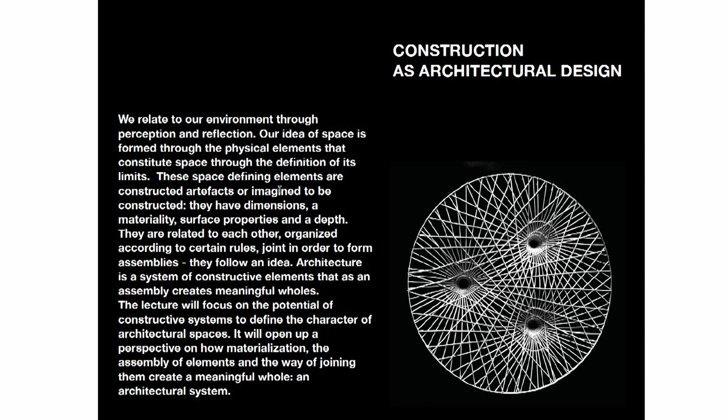Welcome from my side. I'm going to talk about construction and architecture, with the point that construction is architectural design. It's an important, integrated part of architectural design, and has a lot of potential to work with, to define spaces. So I'll try to make an argument for it and show some examples of how that works. If you have any questions in between, I'll try to make a small break.

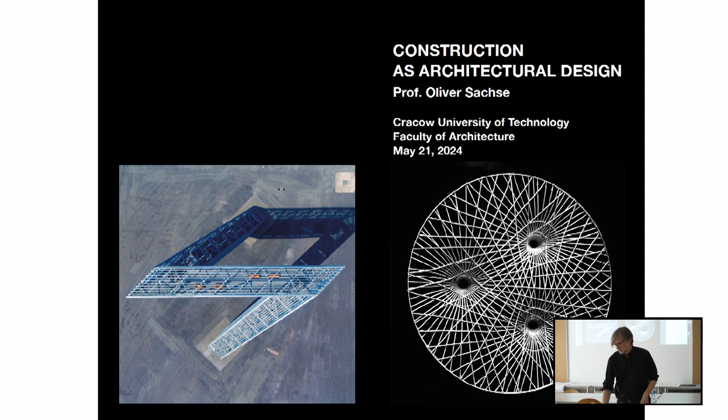If you have any questions, just raise your hand or somehow let me know. There are two images that have to do with it, and especially the right one, a student work, really fascinated me because of its beauty, and it's a pure structure. It really shows the point I'm heading to, that structure is design.

First, let me introduce myself a little bit, because we don't know each other yet. My name is Oliver Sachse. I'm teaching at the University of Applied Sciences in Erfurt, doing a guest professorship this semester, mainly in the second year. I actually live in Berlin, so these are the spots I'm moving between this semester. Erfurt is a beautiful city, about 200,000 inhabitants, quite a bit smaller than Krakow. It has a very historical center, and we also have a nice historical building. It used to be a drawing school from its beginning, so it always had to do with architecture.

We have at our school a certain focus on what I would call constructive architectural design. We call it Konstruktives Entwerfen—really an integration of these two ways of thinking, with the argument that it's actually the same. We're working a lot, and you can see it in these student work examples already, that the structure has a lot of expression. It gives a lot of atmosphere to the spaces that are constructed with these structures.

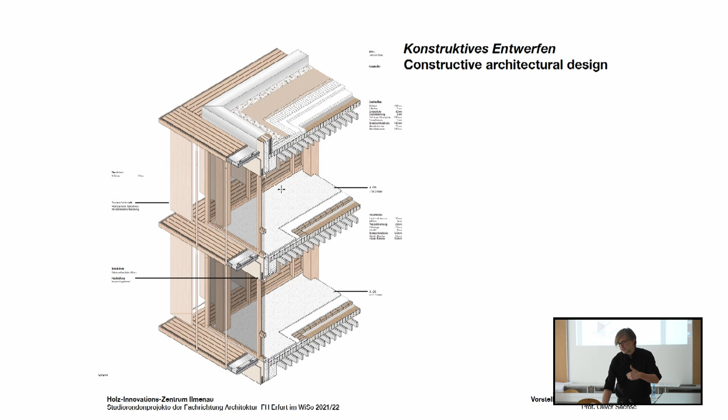It's also moving forward into the detailing, because it doesn't stop with an overall system—it's really about how things are then taken a little bit further into the detailing. All these things, the detailing and the system, belong together. It's always about spaces that are constructed, not about construction in itself. These are second year work examples of our students working with structures to create a certain atmosphere in their designs, in their projects.

I put this in because as a student, quite a while ago, I got in touch with structural engineers. It was in a design project class, and we had consultations with Manfred Grohmann, who became quite a famous German engineer. He did a lot of outstanding buildings, the structures for outstanding buildings. I learned about the other constructor and the way architects and engineers work together, and it fascinated me. I probably couldn't express it at the time, but something was very interesting, so I applied and started to work at their office as a student. This was one of the projects I was working on, being a small part of it, but a very interesting one.

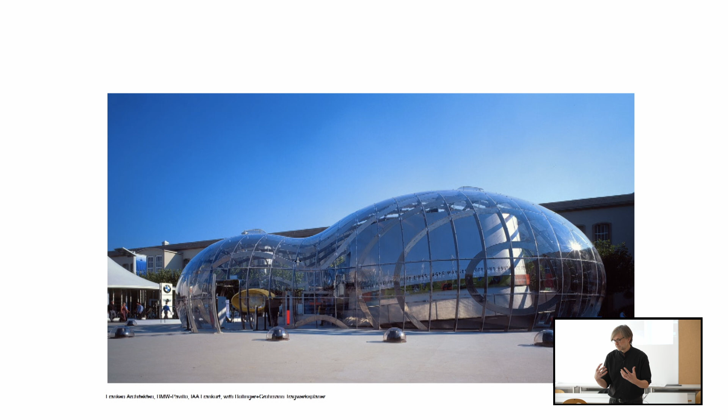It's a pavilion for BMW at the car fair in Frankfurt, by Franken Architects. It was a lot about how to basically achieve this shape, which was a very formal idea. Then the question was how could we build this in a very short time and also make it demountable. We looked at the details—how could we resolve, how could we deal with such a geometry? That was a main part, and how could we really make it work as a structural system. That was the first time I got in touch with these issues in a project.

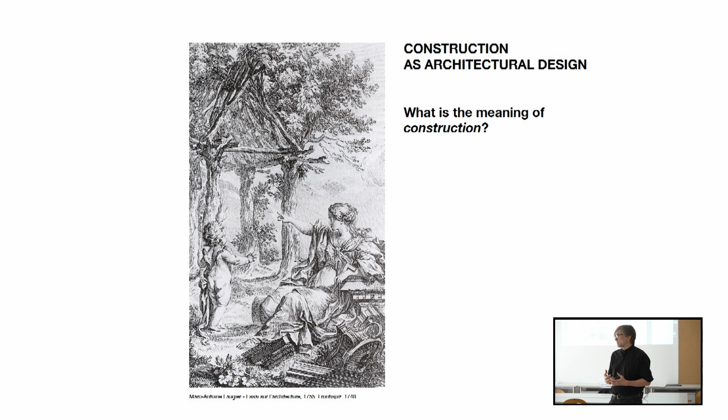So we're talking about construction, and I always like to look into what the word is about, because if you look at where a word comes from, it often tells you a lot about the character of what the notion actually means. So what is construction? If you look at the word's meaning, to construct means to design, to erect, to build—supporting my argument. It also has a grammatical meaning: arranging words or sentence elements together. It really comes from language, and means putting single elements together so they form a whole, a sentence, something that has meaning. I think it has a lot to do with what we are doing in construction.

Construction means the design, the building, the joining of words or sentences to create meaning. It comes from the Latin constructio, a combination of con and struere. Struere means piling things up, putting things on top of each other, or joining them together. That's where the word comes from.

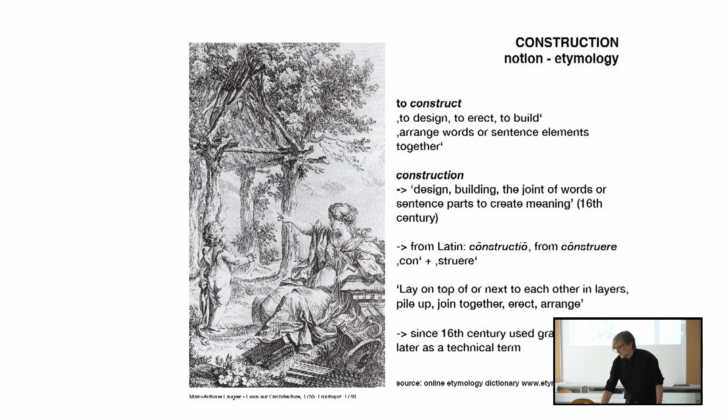It was first used as a grammatical term and later became a technical term. There are many different ways construction is used. You could use it as a design or thinking process through development—how could we construct it so it works as a physical building? It could also be the next step: the physical process of erection is also called construction. And the result in the end is also called construction—what's finally standing there?

I already pointed it out a bit, but I think there are very interesting aspects in the meaning of these words. It's the notion of joining elements together so they form a meaningful whole, something complete, creating a system as a whole. It also has an aspect of a project, which I think is a very nice idea.

The term project has a lot to do with projection. A project is something you have as an idea, which is not realized yet, but is thought to be realized someday, sometime.

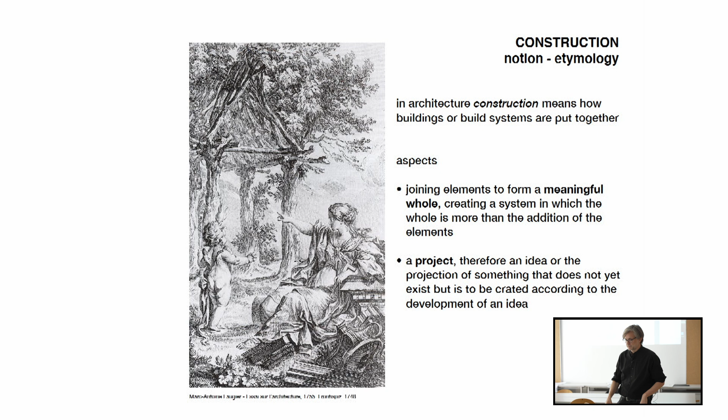You all know this design process. It's kind of a projection, so one-directional. But the process doesn't actually work that way—it's kind of a circle. You do something, you have a thinking, an imagination, you put it down on paper or on a model. Then you look at it, you criticize it, and go back and develop your thinking. So it's a circular process that moves forward, maybe like a spiral.

So this is about the term we're talking about: construction.

Now the question is, how do we actually work in architecture? How do we form space? If we're looking at the formation of space, how does it exist? You can say that's the outer space, something that has no limits, maybe just horizon—not really something you, as a person, could relate to.

There's a nice book about thresholds that I took this from. It's an example from Superstudio, who worked within that space and tried to structure it, because it needs some structure. According to Descartes, as the book says, the world is a spatial continuum, and thresholds only exist to the extent that they are produced. That's what we are doing—we're producing thresholds, producing limits to space, to really define a space.

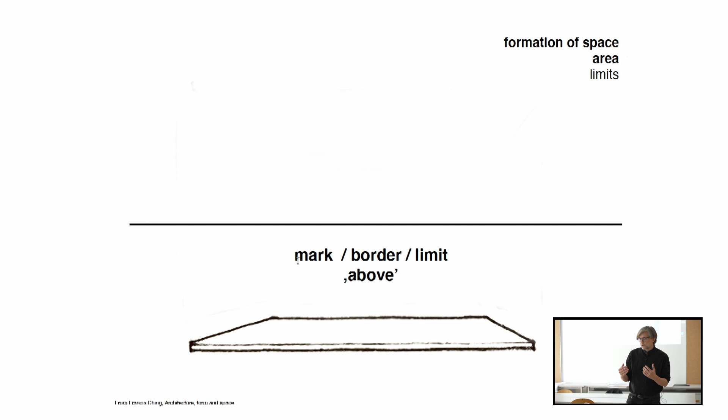How does it work? It could work just by having a plain ground and putting some area, a border around it, and there you already have a definition—something that is above that ground. It's a first spatial definition.

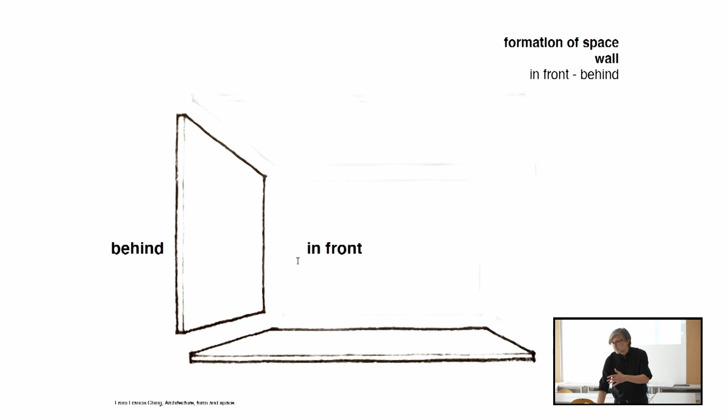You could also say, I put a wall somewhere, and then you suddenly get something—a space in front, that's where you are, and something that is behind it. So there's a division, a definition of space, of spatial qualities as well.

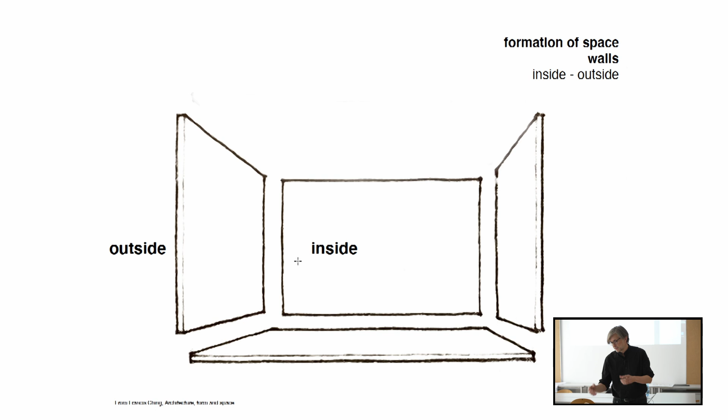And if you put a couple of walls and arrange them in a three-dimensional way, you get something like an inside and an outside—not in front and behind, but inside and outside. And if we put a roof to it, it becomes below.

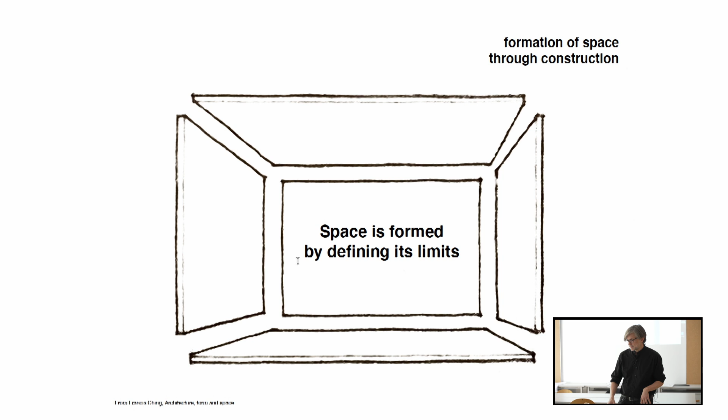So that's the formation of space through construction. Space is actually formed by defining the limits, and that is actually what construction does. It makes these limits. So if we're thinking about how to create space, the construction is our means, our kind of tools that we work with in order to create space.

The physical elements, and as long as they are not built as physical elements, it's kind of an idea of a physical element. So then you have kind of limits, and there's still another very important thing that has a lot to do with constructing, in the meaning I just mentioned, that it's forming a whole, making a meaningful whole, a meaningful system.

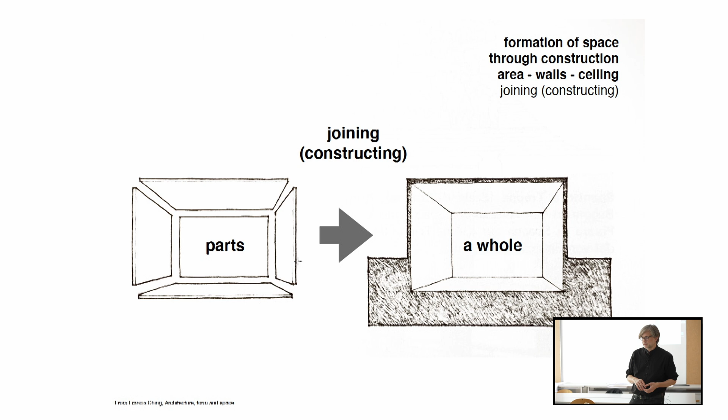It's basically the way that these parts are put together. So you can imagine if you have a roof and a wall and they're not connected, you're not really getting a really enclosed space. You still have air coming through, et cetera. So you have to join these elements to create a whole.

And then you get a system. These things interact with each other, they cooperate, they create a system in itself that is actually more than just the addition of the parts, because they are joined together in a sensible way.

And that is what architecture is. Architecture is a system, a system of building elements that act in combination with each other, that connect these elements, and that also works on different scales. So it works from the big picture, the outer volume, the image that you have from the outside, towards the interior spaces, towards how the elements are assembled within themselves and how they're connected to each other. All that forms one system to create a whole.

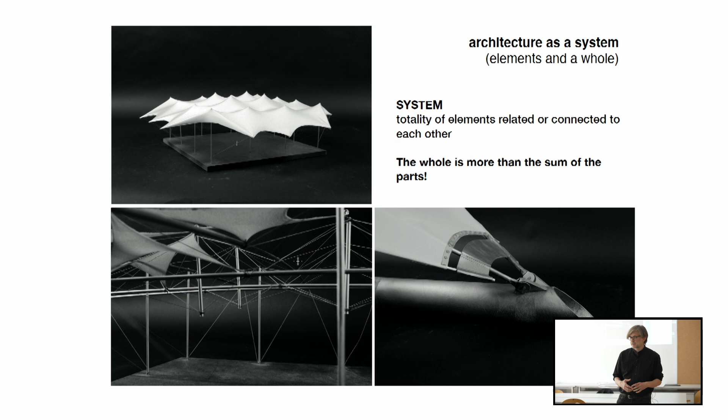And this whole, as I just said, is more than the sum of the parts. I think that's becoming obvious.

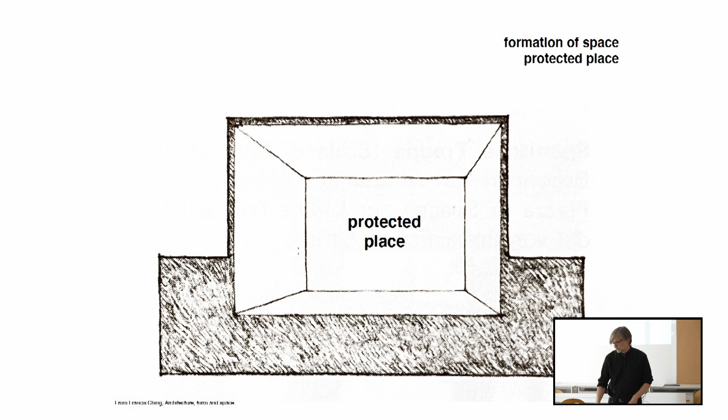So why do we do it? Certainly to create protected spaces, socially protected spaces. In the beginning, certainly climate protected spaces, and it's still very important. We want a warm condition in here, not too hot. If it's getting really hot outside, we want it a little cooler. If it's winter, we want it warm. We want it protected from sound, from people we do not want to deal with inside. So there are a lot of aspects you could look at for the protection of spaces.

He had a feeling that in this time there was so much decoration that he couldn't really see what architecture is about. And he made an argument that goes beyond that idea of a shelter I just mentioned, that the original hut is also an origin of architecture that has certain elements that are bearing elements, structural elements, construction actually.

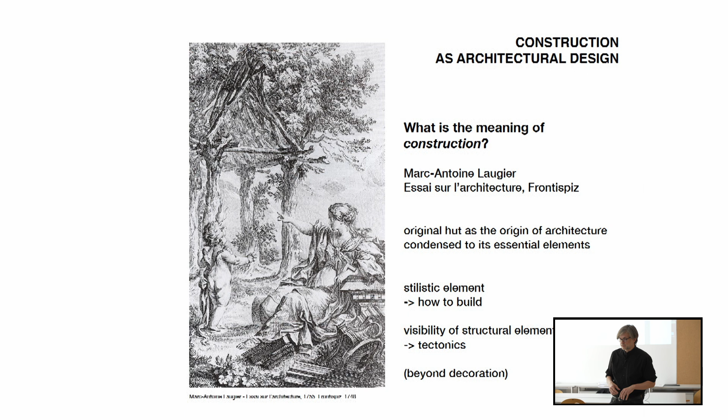So his argument was to put away everything that is decoration, that's added towards it, because that's not what the essence of it is. This was his point, to say we should reduce our architecture to these structural elements because they're actually all that we need to do architecture. Here in front you can see all these elements that are a little bit like garbage, taken away from what is the original idea of architecture.

So what's the relation of designing and constructing? I hope it becomes a little clearer, and to emphasize it a bit more, there's a very nice quote that I like a lot from Andreas Deplazes. He's actually at ETH Zurich, professor for construction and design, so it's like first and second year.

And maybe you know that he has written a very big book about construction. It's like this size, very interesting one. And from this book, actually Constructing Architecture, is this quote.

And it says, 'For me, designing and constructing are one and the same. I like the idea that the form is the result of construction and material, something concrete. However, I would view the restriction to this formula as a mechanistic reduction, because the shape of the form, intentionally or not, carries information beyond its material and constructive component, an intention.' I think there are some very interesting and nice ideas in that quote.

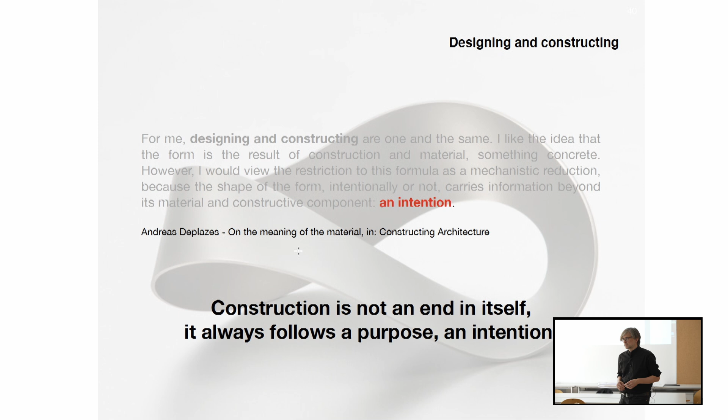And at the same time, it also says the form is a result of construction and material. And it's actually saying we're not designing something out of nothing, but we're actually designing with these materials. We're designing with the elements we are constructing with, in order to define the spaces that we want to have.

So, looking at building materials and the ways of assembling them, we had this quote: "The form is a result of construction and material." So he's pointing out the significance of the material.

Finally, we are doing physical elements. We are creating a built environment that is physical, that we can touch, that forms borders, etc. So the materials we're using, they have certain qualities, they have certain abilities and also disabilities, some things that they cannot do.

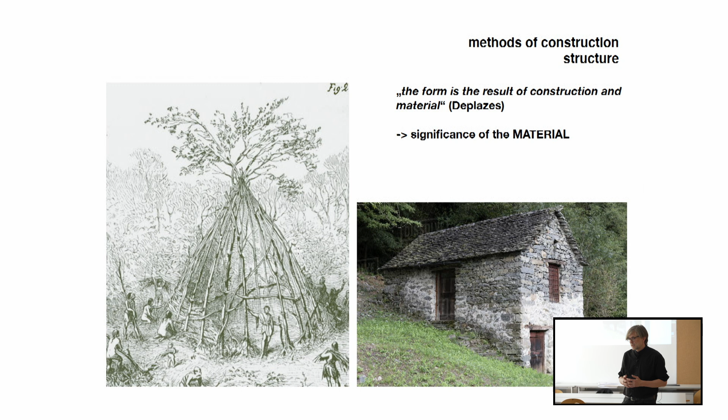And these are very important if you're constructing. And what materials should we then use? I mean, you certainly have to know the materials and see what you can do with them.

In the beginning, it was quite obvious. People needed to work with what they had, what they could find in nature. So it was stone, wood, and earth, basically - these three very principal, archaic, first materials that people were working with, they started to build with. And basically, this led to the formation of very regional construction methods, always depending on what was actually available, what can we construct, because we need something to construct with, so it's actually what nature gives to us.

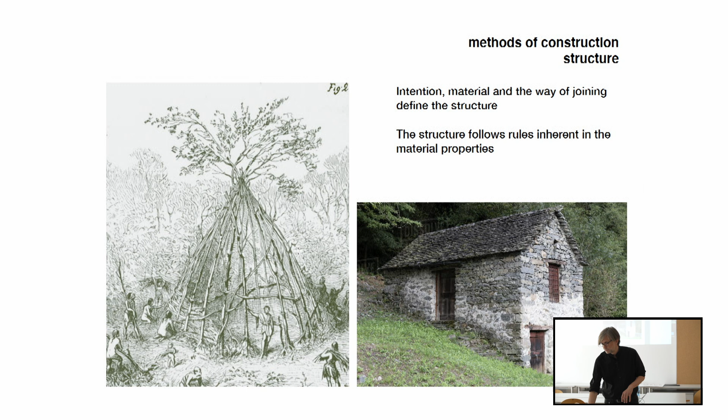And so you could say what's there - the material, the way of joining it, which is a technique, and the intention that you have - they form together a kind of structure, an idea of how elements, how space can be formed with these elements. And it always follows the inherent properties of materials, what you can do with it.

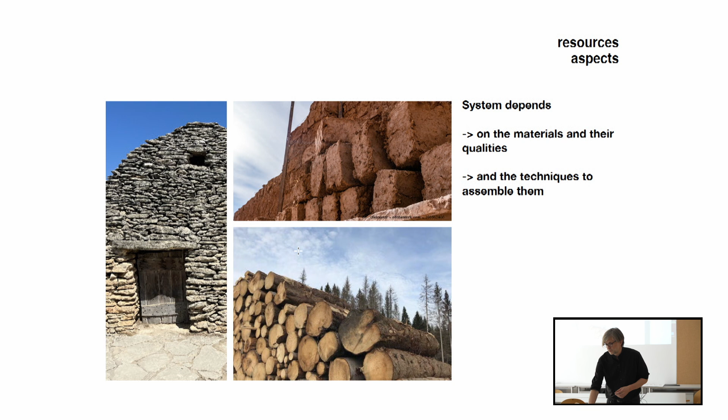Yeah, these are again these three kind of basic materials that people constructed with long before they were architects as such. These are like these traditional materials. It's this aspect of availability, of local building cultures arising from there.

And there's one aspect which I think is very interesting and very important. It's always about scarcity, because you had to really take the material, put some effort into it. So there's always, right from the beginning, the need not to use material thinking you could have as much as you like, but there's always a scarcity, and it forced people right from the beginning to think about how can I build in an efficient way, not using too much material, just using what I need to do what I want to do.

There's certainly a development about industrial materials, and just to mention the two most important ones: concrete and steel. As really industrial, cultural developments, it came long after that, and there's, you all know, a full variety of further materials used in construction. But these are the main, let's say, core materials for structural elements, load-bearing elements.

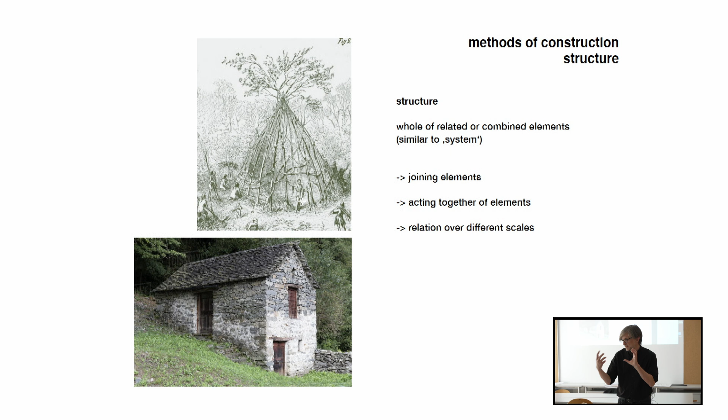I use the term structure, which obviously has a lot to do with construction. It's kind of the same word source. And actually it means something very similar to a system. Construction, structure is something that is joining together elements, where elements act together in a system, and that also creates, over different scales, a relation within the structure.

And you could look at how things are assembled, and what kind of main principles you could discover. You can really see there's two ways of assembling materials, or let's say of creating structures, built structures. It's a massive construction that works with material as a whole, planar elements, walls, and the skeleton construction, which is formed of linear elements. And these are representations of what that means, because you can already see the way the space is created is very different in these two ways.

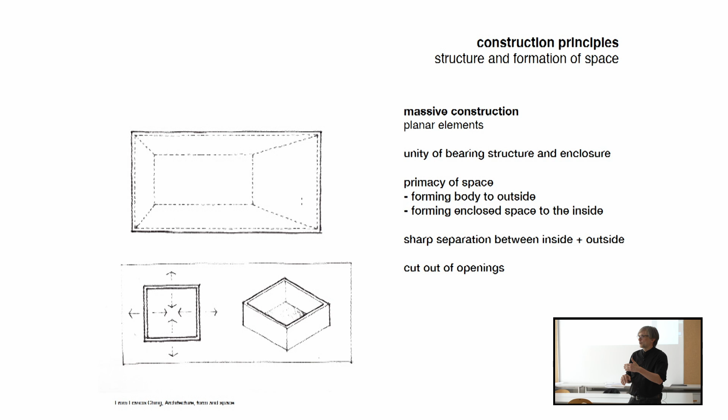I'm pretty sure you've heard about this already. The 5 points for a new architecture from Le Corbusier was actually, well, a little more than 100 years ago, was exactly in that discussion.

There was a lot of construction done as a massive construction, and he said, I want a new architecture. There's new possibilities, technical possibilities. We can put pillars instead of walls. We can make the separations between spaces independently from the bearing structure and give it a completely different shape. We can do a different way of openings.

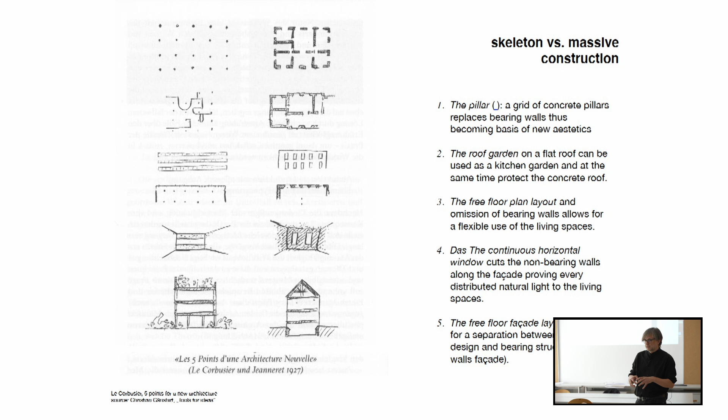So it's really something that we could even in that case say it became something like a political program to create new spaces. And you can see kind of from these sketches, very diagrammatic sketches, but they already say a lot about the different qualities of spaces that are created with these two methods, skeleton versus a massive construction.

And I'm not judging it. Le Corbusier was pretty clear about it. I think they both are very interesting because it always depends on what do you want to do? What kind of space do you want to create?

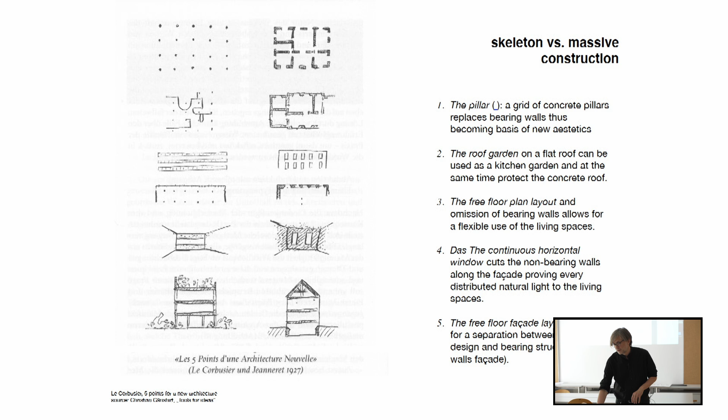Yeah, here again, it's kind of this essence of his point of creating this kind of free floor slabs that you could subdivide in a very flexible way. That's a Maison Domino.

So the materials, going back to that, the materials have kind of an inherent logic. Take for example a stone, which is a very small element, that you need a lot of to put together to form a wall, and you kind of need to assemble it in a way, and it's a way of layering.

It's not, and it has very different properties depending on the direction. It can carry a lot of load in the longitudinal way, and is not that good in the transversal way. And it has, from nature, kind of this linear extension. So it's obvious you need to work with it in a different way.

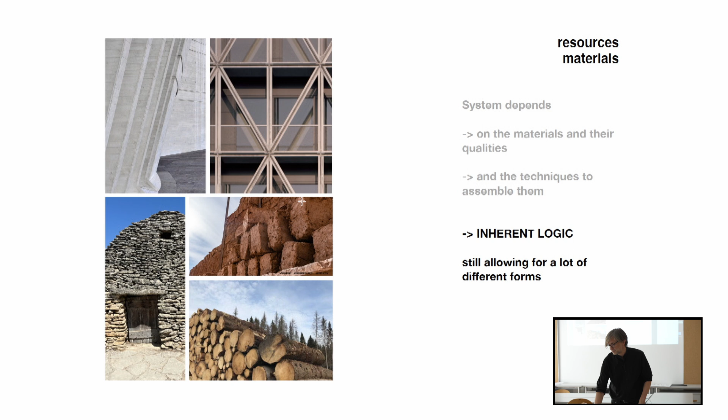And then you could say, okay, if I have a certain logic, I can just use it this way or that way. And I think this logic is something very strong, but it still allows for a lot, even if you follow this logic.

It still allows for a lot of different, you could call it phenotypes or expressions, a way of finally assembling them within a set of rules given by the material. Actually, on my last vacation, I found a very nice example. It was a small village, basically in southern France, and they just used stones they found on their fields for construction. It's a very archaic way of assembling. There was a nice exhibition about these types of structures, and there are a lot actually. I knew them from pictures from Italy, but you can find them all over Southern Europe.

So they had this table, really showing how many different ways there are to work with that stone, how many different ways there are to assemble them and create spaces differently, still following the same assembling rules that lie within the material, because otherwise it would just not hold. You need to lay it somehow.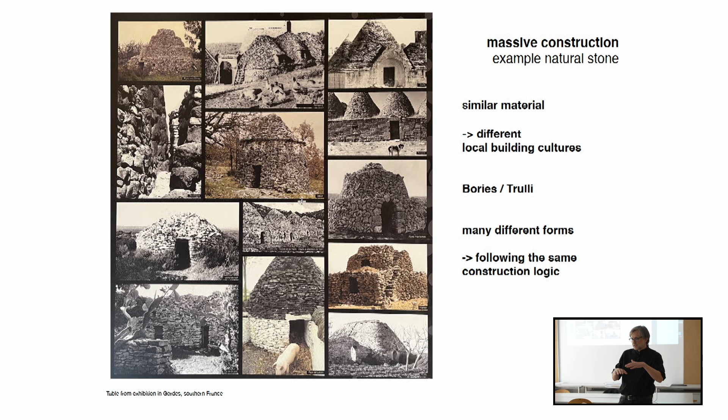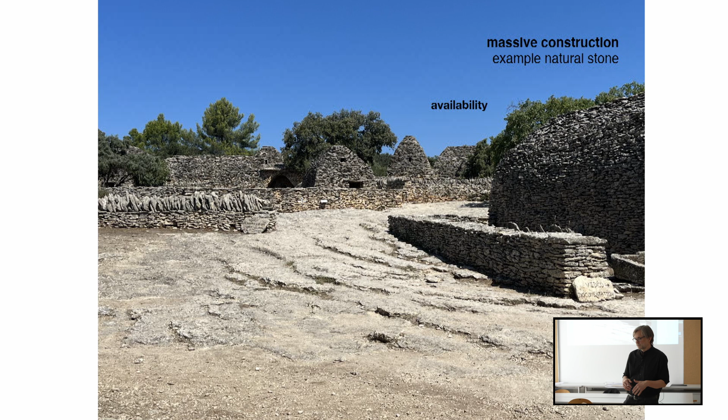There's a little overview of where these examples come from. It's mainly southern France, Spain, and Italy. So it has a lot to do with availability — rather dry areas, not so many trees, but a lot of stones. So let's use them to build.

It's this principle of layering, and it has the principle of the false arch to assemble the stones for the roofing. There's this arch, which by its shape and the way the stones are assembled creates a stable covering of the opening.

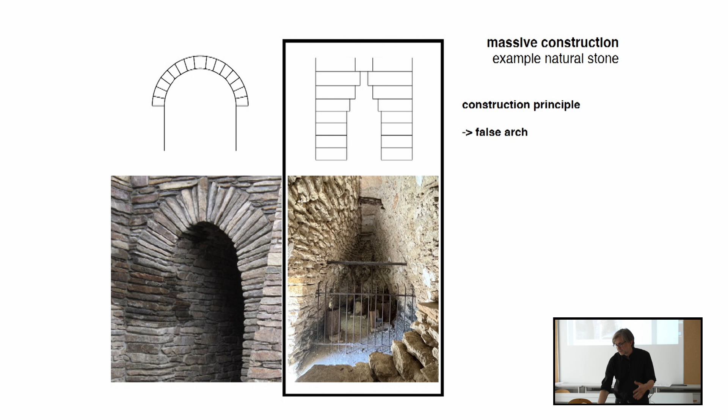And then you have what's called a false arch, because it's not really working with that geometry, but it's cantilevering the stones a bit more from both sides until they meet. This is actually the principle used in most of these structures.

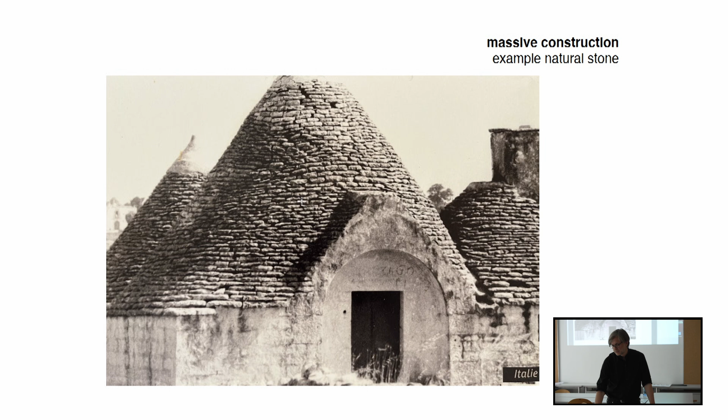I'll just run through the different shapes from this table, all created by the same technique. There are a lot of round structures, but also rectangular walls and a shape that morphs into a round cupola.

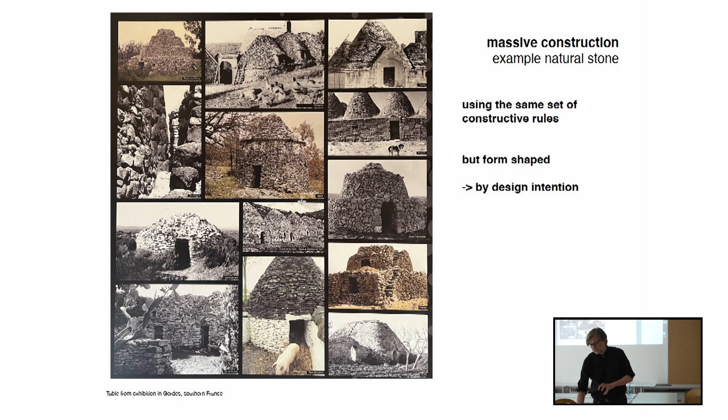I just think it's very astonishing how many different shapes people can create with the same set of material and the same rules. That's about the intention — what do I want to do with it, what shape is right for me for what I'm using this building for. It's a small excursus to show that even with a fixed set of rules, you shouldn't be afraid, because there's still a lot of liberty.

Talking about university, it reminded me of a book I found a couple of years ago that I really like. It's about first year construction and the basis of architecture, by Professor Annette Spiro from ETH Zurich. She makes exercises with her students about three principles of joining materials together.

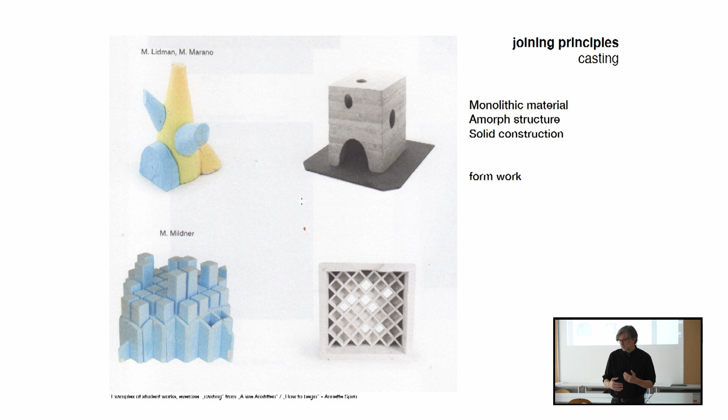So there's the technique of casting, the technique of layering, and the technique of frameworks. With casting it's a monolithic material, could be clay or earth, which has an amorph structure to create a solid construction. These exercises look like this — you can see there's a form, the formwork used to create certain spaces, which is very important in this technique of casting.

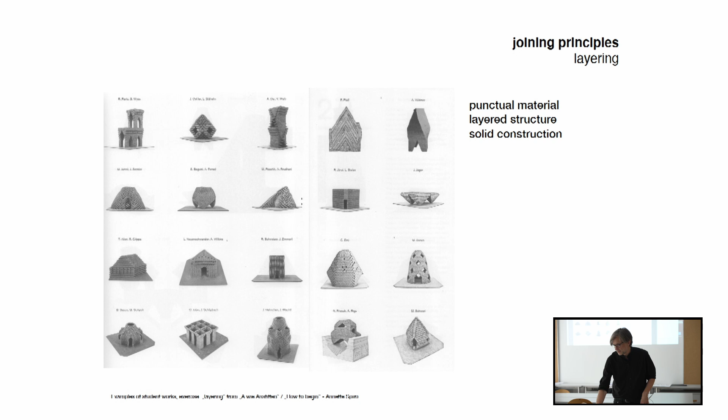There's also this principle of layering, done with stones or smaller elements. It's a layered structure, a solid construction, but you can work on it to make it a bit permeable. It has a very modular logic. If you work with brick someday, you'll see it has a very strong logic, and still a lot of possibility to create different shapes, to use it in different ways, while still following that same rule and principle of layering.

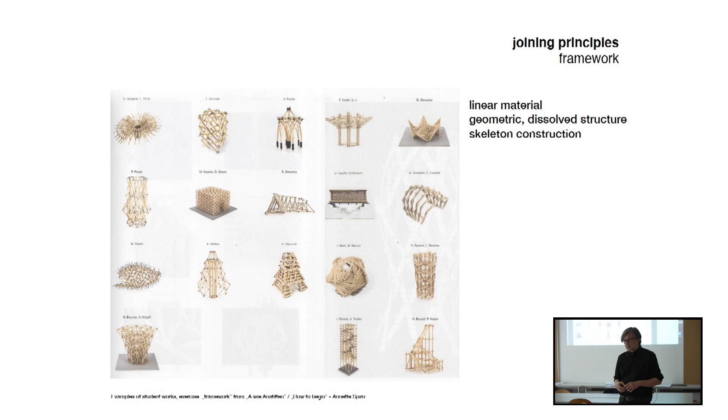And you also have this framework, linear constructions, often done in wood. I already explained why, because it naturally has this property — dissolved structures, skeleton constructions with this linear material, that can again be used in very different ways.

There's a very nice quote, and I will try to get the video online. I hope it works fine. By Louis Kahn. Have you heard of Louis Kahn? He's kind of a mid-last-century architect, a very important one actually. By his time, all my teachers were saying he was kind of their master in a way, and he actually worked a lot with the properties of materials.

Design demands that one understands the order. When you are dealing or designing in brick, you must ask brick what it wants or what it can do. And if you ask brick what it wants, it'll say, well, I like an arch. And then you say, but arches are difficult to make, they cost more money. I think you can use concrete across your opening equally as well. But the brick says, oh, I know you're right, but if you ask me what I like, an arch. And one says, well, now, why be so stubborn? And the brick says, may I just make a little remark? Do you realize you're talking about a beam, and the beam of brick is an arch?

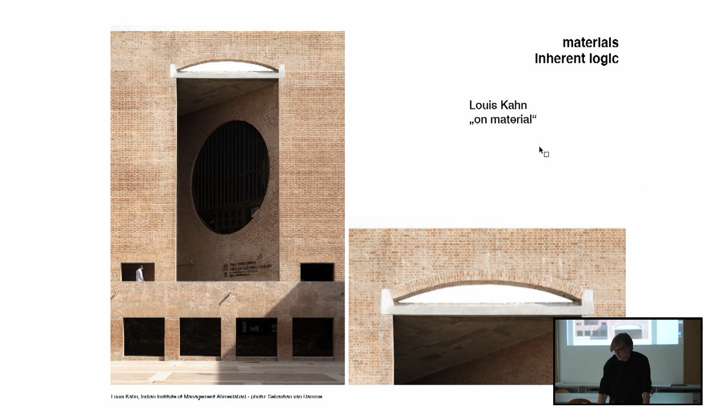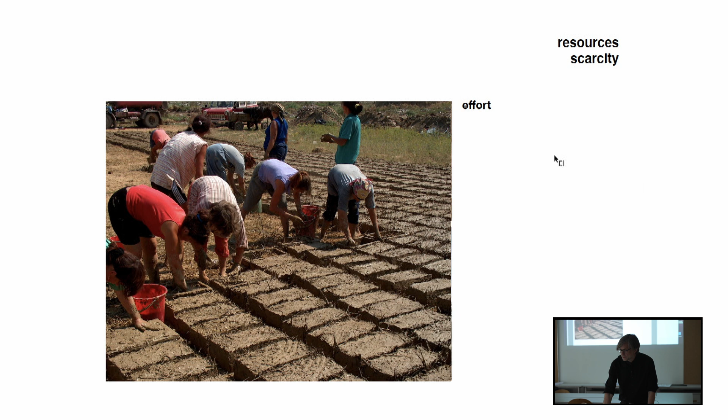I kind of mentioned that when we were talking about materials already, and scarcity is, I think, one of the very important drivers or ways of thinking. How do I use material? How extensively do I use it, or how reduced can I use it? A lot of construction is actually about dealing with scarcity, because taking materials and creating them is always related to an effort. You have to take them out of nature, you have to form the bricks, and it's a lot of work, a lot of energy that you put into it. So there's always this pursuit for efficiency in construction.

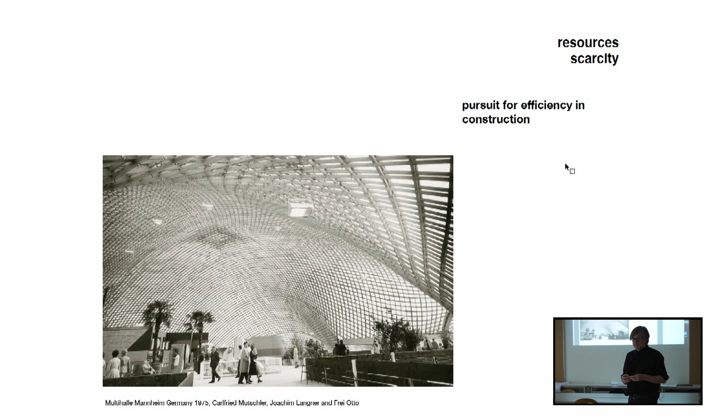And it goes even further, there's no end to it yet. This is also a very nice wooden structure, the Multihalle in Mannheim, Germany, by Mutschler, Langner und Frei Otto, who is kind of in between an architect and an engineer—he won the latest German Pritzker Prize. You can see how this really wide span is done with a minimum of material.

You could say, okay, this is a kind of an old topic, and that's how I've always explained it, I always had to do something with it. But we are in a situation right now where it becomes obvious again—it's never been different—that taking resources requires an effort, and we are actually right now in a crisis of resources.

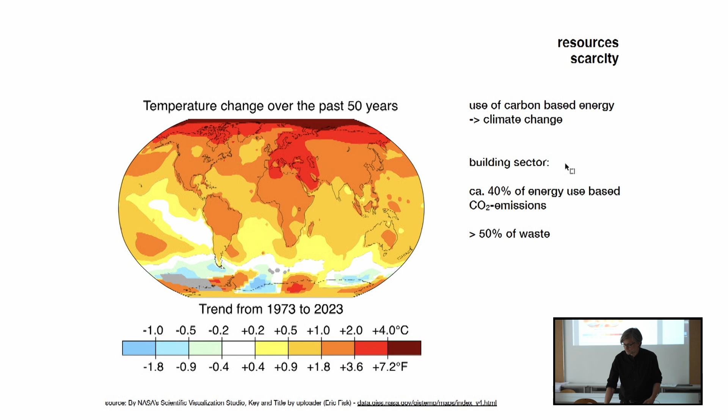So it's the limited material resources, the use of carbon-based energy and the climate change caused by it. The building sector has a big factor in this - it depends how you account for it, but around 40% of the energy use worldwide, and the CO2 emissions, are actually coming from the building sector worldwide. And it's 50% of the waste produced - buildings that are thrown away. So these are very, very important issues to deal with.

And yeah, there's certainly strategies to deal with it. There's the use, or reuse, of buildings - saving materials, saving the energy that was once put into these materials to produce them - or the reuse of building elements themselves, which is a discussion going on right now: how could that work, to reuse building elements, to reuse windows, trusses, etc.

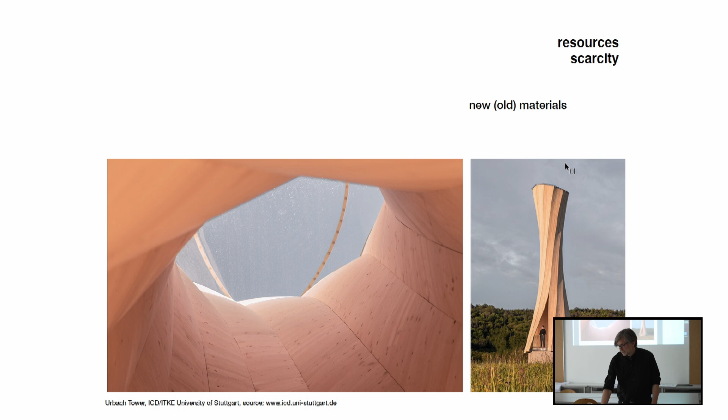And there's also certainly a look for new materials, renewable materials - materials that were used before, like wood, but manufactured in a very different way. You can see profiles of wood that you would usually not use in construction because they're too thin. But there's a lot of that actually, and it's a renewable resource. It binds a lot of carbon, so it could be a very interesting material, but the question is how do we use it properly?

So this topic and aspect of scarcity is something very important. It was there from the beginning, and it is until now, and there's a new awareness of it now, which I think is very interesting.

Now coming to the main core: how can structure actually be used to create space? How could that work? I actually like these two images a lot. They're from an Italian architect-engineer, Pier Luigi Nervi, who built with concrete and steel. He did these two big halls - a sports hall on the right side, Palazzetto dello Sport in Rome, and Palazzo del Lavoro, an exhibition hall, on the left side.

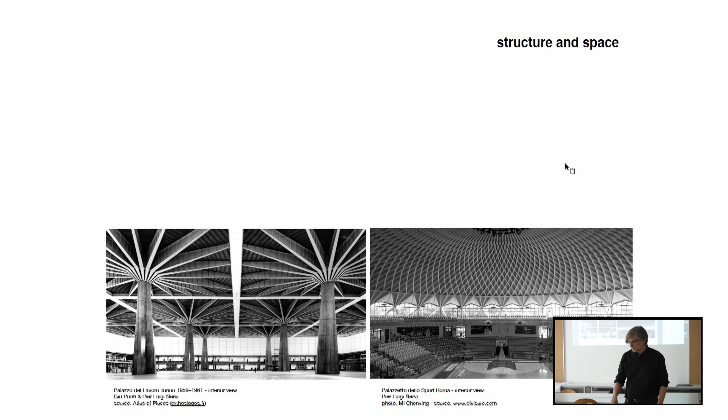I showed it a little bigger because I think they are very strong structures that define the spaces, and there's not much more than these main bearing structures that really define the character of the space. You have these mushroom-like, non-directional elements added to each other - you could extend it virtually to whatever dimensions you'd like. A very open facade, and this light coming through these elements.

And then there's this Palazzetto dello Sport, which has a completely different atmosphere. It's not open to the sides, even though it has this window, but it's really a very protected, held, embraced space, you could say.

You can see that the structure is different, even though in both cases you use it as a formal expression. In this case, it's actually precast elements that were cast in place, then combined to form this cupola, this shell. But they create a completely different space—this embraced space versus this kind of open, flowing space.

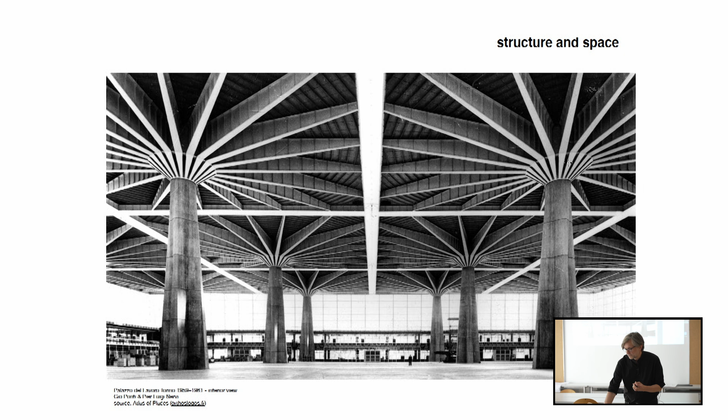I think this is a very nice example to see how even with the same way of thinking, you can create very different spaces. There's always certainly an outside to the inside. I'm showing these interior spaces where you can mainly see the structure. In this case, it also shines to the outside, so there's a volume connected to it.

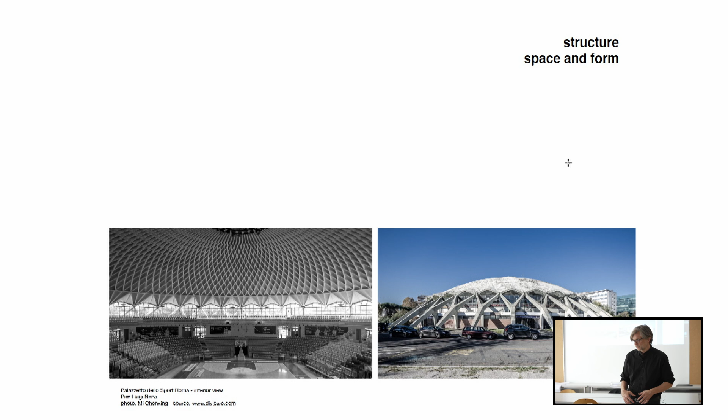And also a very different one at the Palazzetto dello Sport. Also, the way it works to the outside is very different. So it really depends on which structure, what system you're using, what geometry you're using, and what structural system you're using.

You could create a very different expression of your spaces. I think it's a big opportunity not to hide these structural elements, but really to use them because they are there. Thinking back to Laugier, they are there and you can work with them, to express and look for the right system to support my idea of a space, of how a space is covered.

So there's a support grid which is non-directional, which works in both ways—a little bit like this. It's a different system, but kind of the same non-directional logic as we've seen in the Palazzo del Lavoro.

And then there's this directional type that basically works with either beams on columns or frames, where they're added in a row, set in a row, and then the spaces, as you can see, are stretched. They get a direction.

So we can emphasize through the structure what kind of space it is. Is it a space that has a center? Is it an open space? Is it a stretched space? That is one of the core elements of the properties of a space.

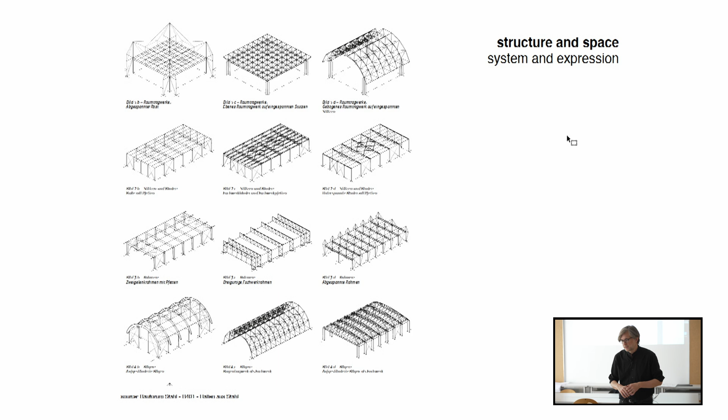And there's certainly a lot more. There are principal systems that also have a certain logic in themselves, and there's a lot of different ways to do it. It's a little bit like this principle with the stone houses, the trulli structures that I showed you. There's a lot of different ways to do it, working with these different systems, and they create very different spaces.

So this is like a non-directional space. You can see in the roof structure, both directions have the same layer, the same importance you could say. And they're sitting on columns.

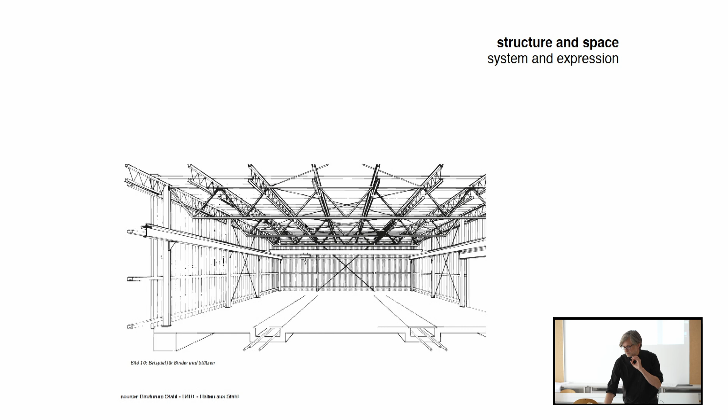And this is a truss-based hierarchical system. So there's a big, very dissolved truss in this way, and then a secondary, much smaller one in the other direction. So the space gets a direction.

Or this one, which also, even by its shape, covers and even more emphasizes this direction of the space. Or these frames that are doing more or less the same—they have a rather short sequence in one direction and a longitudinal direction, and then this wide span in the other direction.

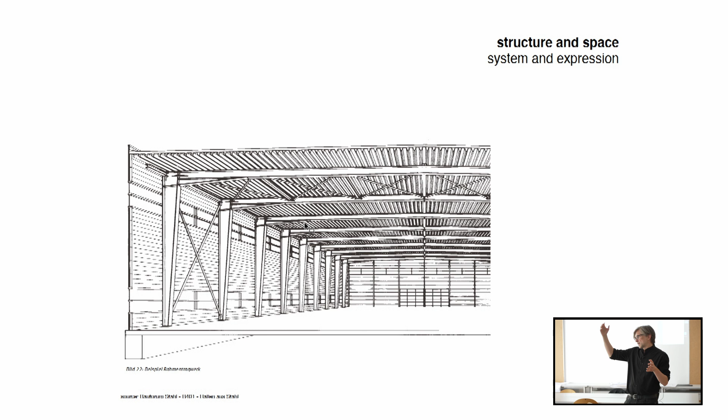And they create very different spaces. So it's really about showing how the character of the space is formed by the structure, if I use it really, and show it, make it visible, in order for it to really work.

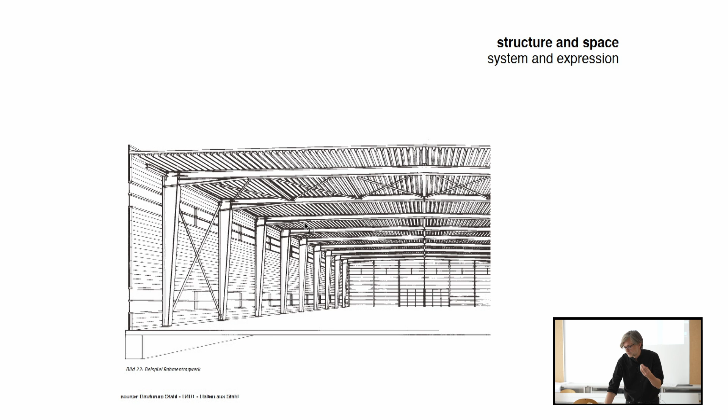And there's a lot more aspects to these principal systems. It depends on the material, certainly—do I use steel or wood, timber construction or maybe concrete? It's the structural system in itself. I showed a couple of these to see how the system and its logic already gives you a different atmosphere.

But still there are much more things you can manipulate and work on. You could look for the geometry—we had this radial space, we have rectangular spaces, and the dimensions could be very different. The position of the columns could be on the outside, or maybe a bit to the inside with a cantilever to the sides. There's the shape of structural elements—are they strong, sitting columns? Do they have...

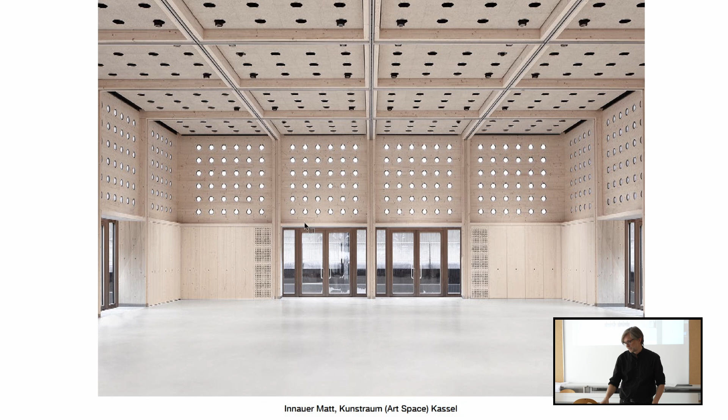So all these layers work together, and they form a whole as a system to create an architectural expression.

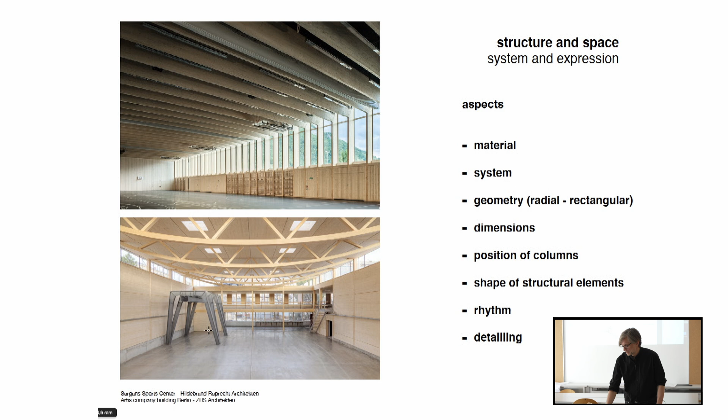Here again, this very dense rhythm shows how a system works together with the exterior, the form, and the play of volumes in this case, with this very dense sequence of structural elements.

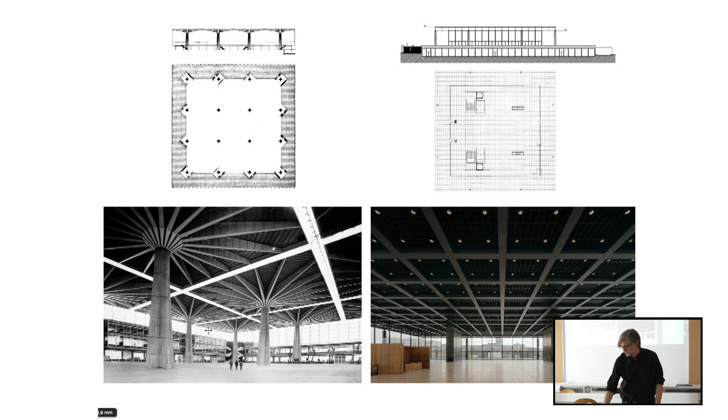Here again, a little bit larger, and the other space — see how different the atmosphere is.

Okay, I didn't make a break. I was announcing a break, but anyway, I'm always almost at the end, and would just like to show a couple of examples.

Still to point out certain aspects about structure and construction, and how that can relate, on which layers, to the expression of architecture.

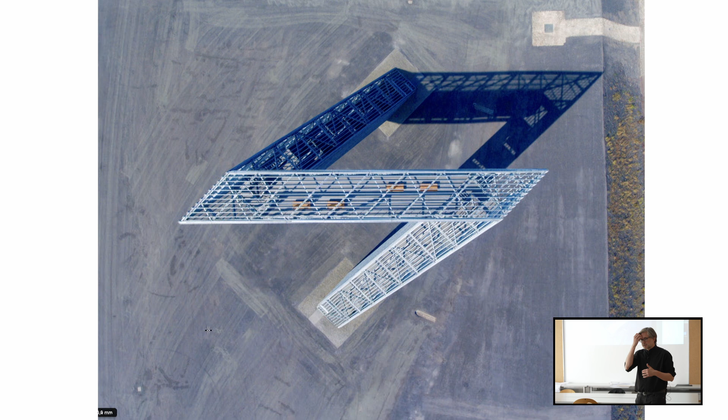This is actually a mountable sculpture in a coal mining area in Germany, Saarland. It's made out of steel. It was kind of a monument to the end of that era, because they stopped coal mining around 10 years ago and wanted something to memorialize that era, while also having a notion of future.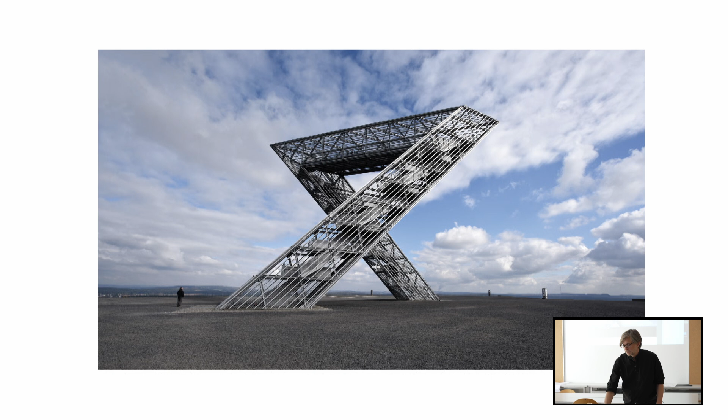It's placed on an artificial mountain on top, with a wide view. It has this shape of these kind of three tubes.

There was a very important design-driving idea of having something that is changing, because that's kind of what the client was asking for. They wanted something that represents the change from the past to the future, like a development. So the idea was to create a three-dimensional sculpture that, viewed from different perspectives, creates a very different shape that can be read symbolistically or just as an abstract change of appearance.

It also changes from day to night using the light in the interior. What was very design-driving in this case was to give the structure an atmosphere, a feeling of association with these coal mining structures. It had to be something similar without copying it directly—not exactly this, but something with a similar logic, kind of coming from there.

Underground there were these very strong linear elements, these tubes, that became the inspiration and made this sculpture readable as something from the same family, with the same logic. On an associative level you can see this tube-like quality represented in the form of the sculpture, and also in the structure, the space, the way things are assembled, and the materials used—it's steel, as was used a lot underground.

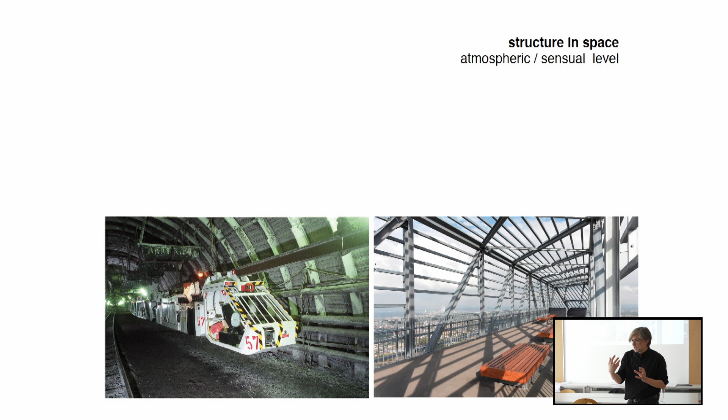There's a certain spatial familiarity, you could say. The thing is assembled of a main bearing structure and circulation, and then there's still this surface, this facade going around, which is completely open—it's a grid, but it still completes the form as a whole. From the inside, it reads like this.

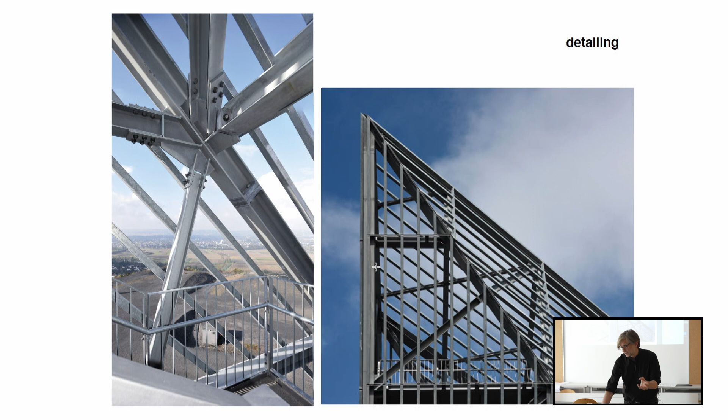It goes down to the detailing too, which is rather rough, very industrial. We discussed it a lot with the engineers and the companies—how to do it and give it a certain hierarchy, making it really readable in the way we wanted. So the whole thing needs to work together on these different scales.

It has different scales: as a shape, as a whole—this idea of a three-dimensional sculpture that changes its appearance as you walk around it; the atmosphere of the space itself relating to these old coal mining structures; and then the detailing, which also reads as important for the atmosphere, because you perceive these things. It's not just building, not just one layer you're looking at—it's not only about the shape, but has more aspects to it, and that's what I want to point out with this example.

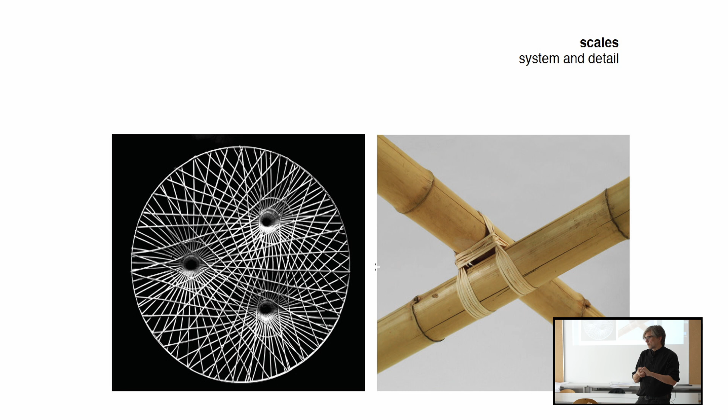I always try to do this at the university too—working with structures and expression of structures, creating them as a whole, as a system. There's a really beautiful image I like so much on the left side. It was a lot about detail and the system—how they interact, how one is the reason for the other. They're linked together, can't be thought of one without the other. There's a certain logic of joining things represented in the whole, and the whole requires a certain way of joining elements.

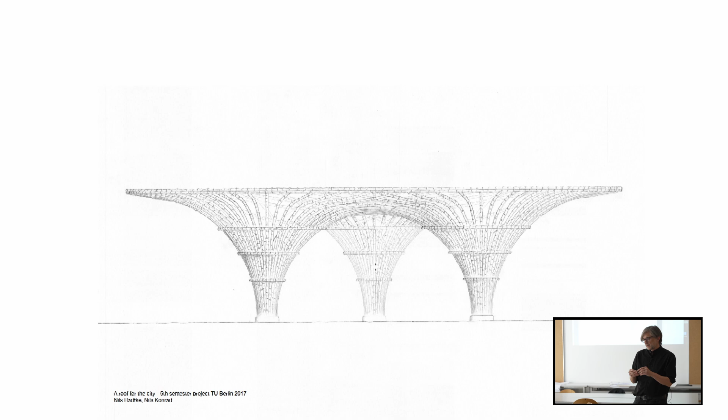This student work from Nik Konrad—they worked with bamboo, wanting to create a very centered structure, and found a geometry for how to join these elements together. They worked further on the atmosphere—all of these joints give, as a pattern, something to the structure that you read as someone being there or looking at it. You can see all these joints visible in a way, giving a surface pattern to the structure as a whole.

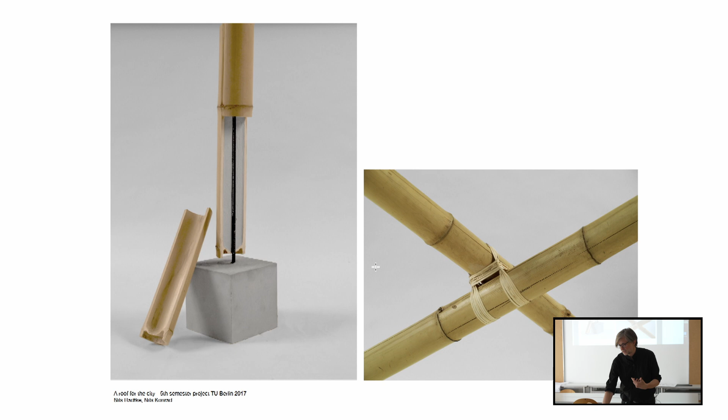They developed this further, even developing the details—how would you join this, how do you do the foundations with this material, how are other joints made—and even built large-scale models to show how that works. While developing the details, the overall shape changed, so there's really this interdependency between these two levels, and that's what I want to point out. It's similar to this one you've already seen, same semester, same project.

Also like an overall idea, a system, how the elements join together, and then really looking at the details - how can I really make the elements work in that way and transmit the forces in that way that the structure works as a whole. It's the overall, the system, and the detail.

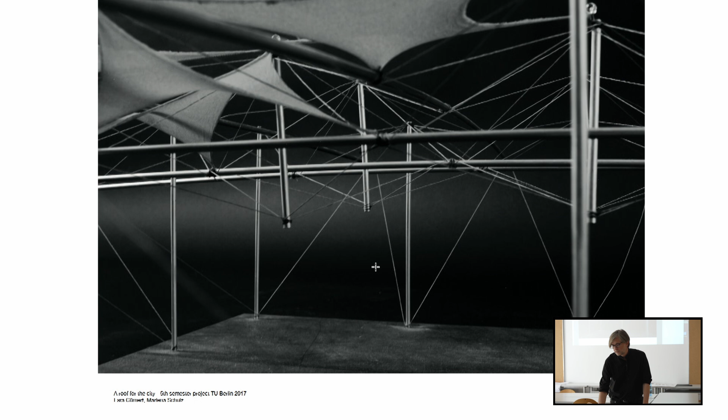And then certainly there's a lot to expose afterwards. So it was a lot of case studies done, and then kind of learning principles, and then transmitting them into your own design idea.

Well, this is the last project. It's a current one that we're working on right now, and I've shown these timber thinnings, these very small wood profiles that are industrially actually not used yet because you cannot efficiently work with them. Most of the machines are too big to work efficiently with them. And we have actually a lot of that material because there's a change in the woods, there's a climate change.

And we are just looking at how else could you do it, and how could you maybe also work with it as an architecture. And we see this is an element that has certain properties. It has a lot of difficulties because you don't have a profile that's the same all along, but it changes dimensions, changes direction a little bit.

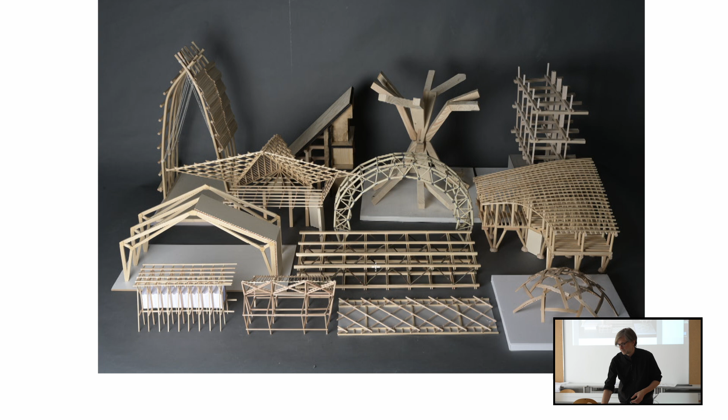So again in the beginning we were looking at examples, case studies, analyzing them as a system, but also already as a detail, and then looking for references that might be interesting to work with these principles.

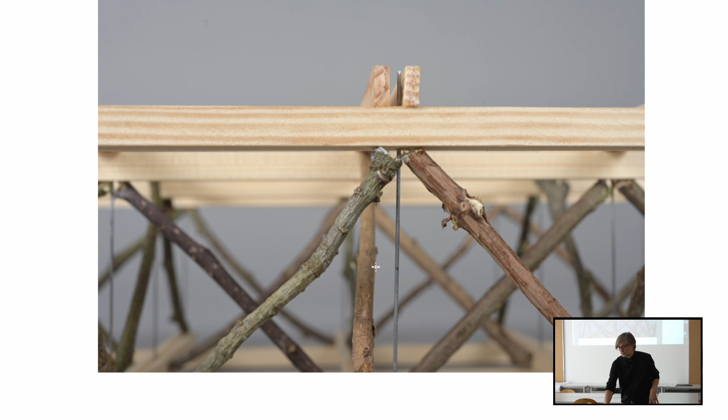So this is one of the case study analysis elements. This is actually a project - the original project, so it's a detail. It's still the analysis phase. It's actually this project on the Hooke Park.

It's called Field Station. It's from the AA, the Architectural Association in London, a project that they're doing with their students, really to see - they have this field and these woods that they're working on, and they work a lot with these timber thinnings, these very thin profiles, and see how can we manufacture them, and in what way can they be used.

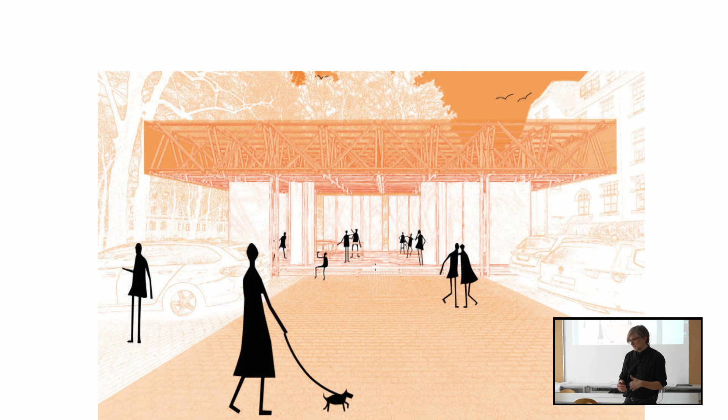So our students made a couple of proposals for this. This is just one of them, with a roof structure, a little bit similar, or familiarities that certainly got inspired, though it works a little different. Our intention is we went to the next step and really see how the manufacturing works with that, and said okay, we need to really try it out.

We need to find what are the ways to join these elements together. So our students built large-scale models, 1:3, 1:2 scale, with these profiles - 4 different proposals for spatial structures. All of them have their own principle, and they have certain aesthetics.

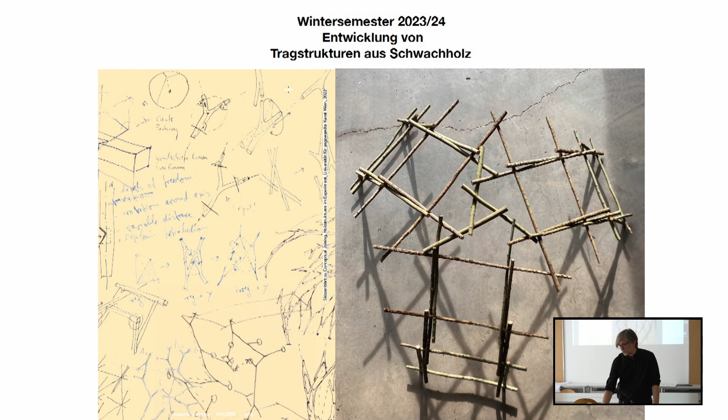Some of them are using a lot of material, like this one on the left side, and others, like this one in the back, which I've also seen here - this one really reduces the amount of wood elements very much. It's very, very few structural elements that you need.

And so the material is these timber thinnings, and you can see how irregular the material is, and can imagine that it causes a lot of issues that need to be resolved.

So at the end of my lecture, I'm trying to give you an idea of what I think is so fascinating about structures and how to use them - how they can support, how they can actually form the spatial expression of architecture, and how that's always connected between the whole, a spatial idea of a whole, and the way of actually breaking it down even to the detailing. Thank you very much.